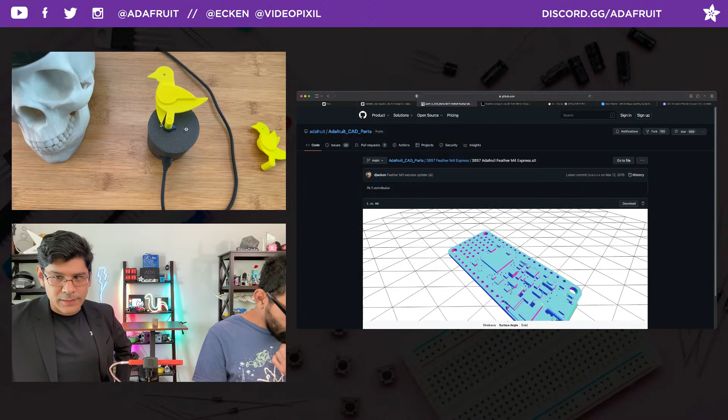They have this little viewer here. You can change up the type of rendering in the viewer, which is kind of nice—you can get a good look at it. And you can download it right here if you need to, so you can download it that way.

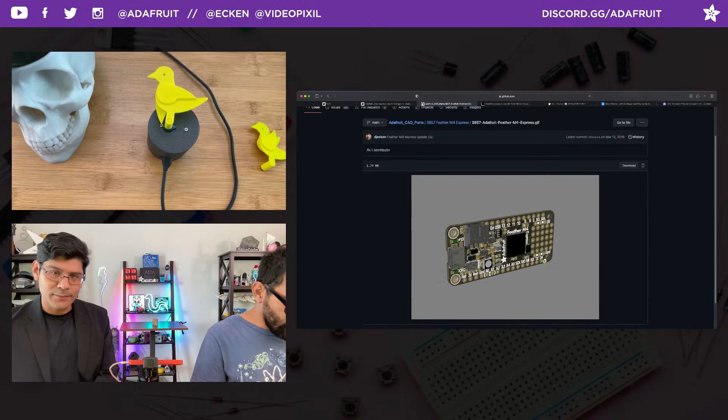We also have a GIF or a JPEG as well if folks want to just get a look at it. This kind of includes the silk screen and some of the traces and things like that, which is really over the top. But it's sort of a free thing that we get because of the way we generate these.

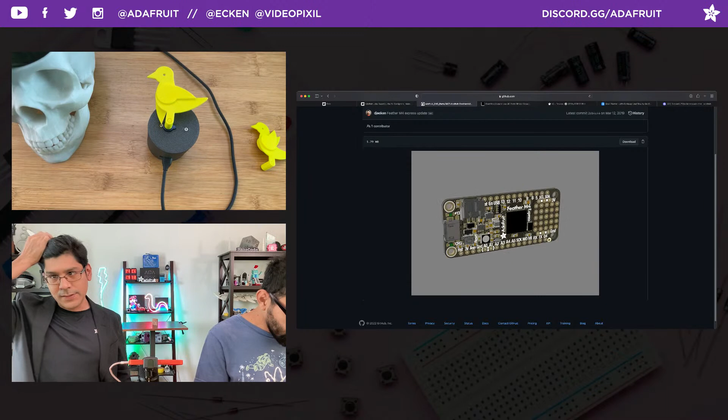Literally, we take Limor's Eagle CAD design and click a button that says convert to 3D model, and that brings it into Fusion 360. Then I manually map all of the components, such as the USB connectors, the JST connectors, resistors, and all the onboard IC chips.

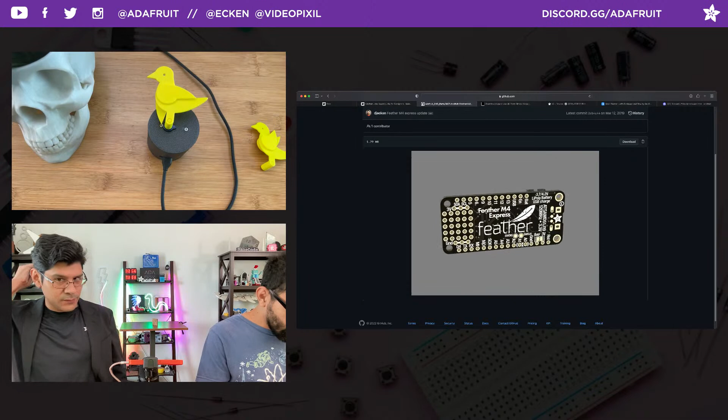Yeah, I have a layer-by-layer tutorial if folks want to learn how to do that process. Fusion 360 and Eagle are still free, so you can give that a shot if you want to try to make some parts that we haven't made yet.

If you don't find what you're looking for, you can go to the Issues tab and create a parts request. So that's totally okay to do.

And then I want to give a shout out to everybody who's been contributing, creating pull requests. And if you have not used GitHub before and you're a little wary of doing a pull request, we have it heavily documented in our Learn Guide.

So now over to the Learn Guide. You can search for it, or you can see it's part of the new Learn Guides published this week. The overview here just kind of walks you through what the CAD parts is. We also have some more deep dives into using GitHub, like an introduction to GitHub or contributing to the CircuitPython repo on GitHub—we have dedicated guides for that.

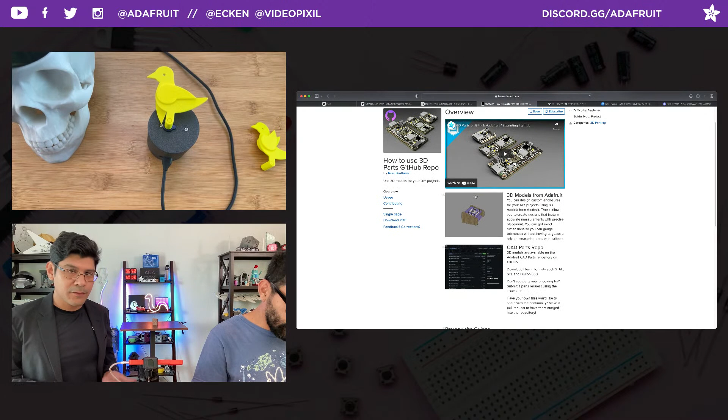But mine really is focused on how do I use the desktop app, the GUI interface, so you don't have to do any terminal stuff. It's really simplified. So the usage page just walks you through how to use it, kind of just how I showed you guys now—how to browse through it, naming convention, what type of formats you'll find, and how to do the parts request.

So all that's there, documented, and then there's a link to it. The contributing guide really sets you up from zero to finish.

So creating, first of all, download the GitHub desktop app. I cannot recommend it enough. If you're new to GitHub, consider using the desktop app and not worrying about commands, because it's really easy and user-friendly to use an actual desktop app that has buttons and things.

Yeah, I saw Brent post that the latest, I think it's the Ventura macOS update, deleted some of the Git commands, so you have to manually reinstall those. So this would probably help out with that.

Sure, yeah. So once you download the desktop app, you'll want to create your login, then clone the repo. I'll just walk you through which tabs to click on. You want to go to the URL tab to clone the repo, and what you're basically doing is downloading the entire subset of parts onto your local drive.

If you want to contribute, that's kind of how it has to be. If you're worried about file size, consider that, but I don't think it's more than 1 gigabyte or anything like that. I think it's under 1 gigabyte, but we'll see.

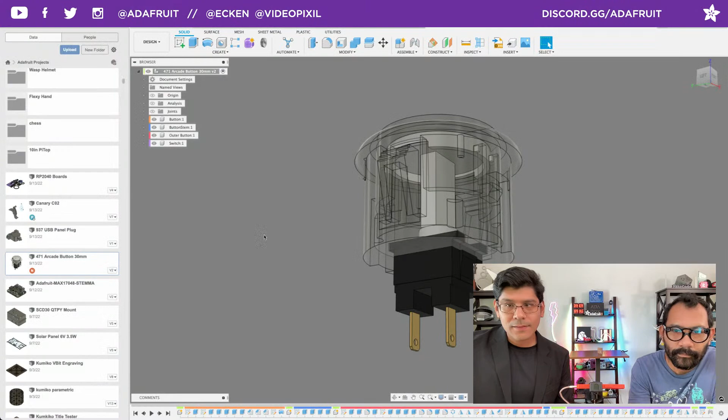But take a look at the model here in Fusion 360. This is a fantastic model by Ari, and they did an awesome job. This is the Fusion 360 file, so you can see exactly how they put this together, and it's accurate and very detailed. That's very cool, a lot of work put into this part. Looks fantastic - I like the way the timeline looks.

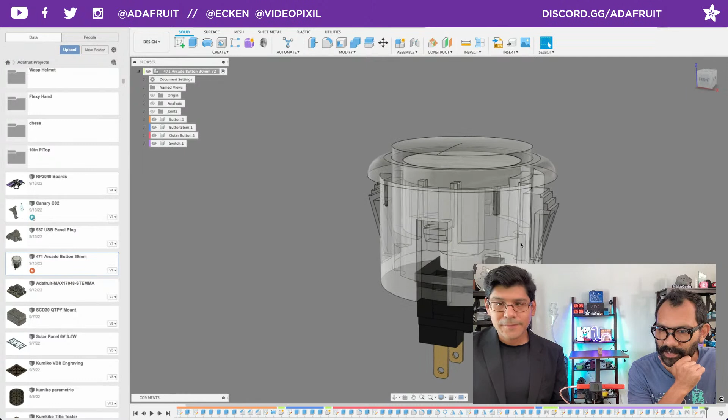Yeah, I try to keep my timeline to like one scroll or no scroll bar where it shows up, so I like combining jobs into one thing. Fantastic, which means no moves - don't move stuff. Also added was a USB panel plug.

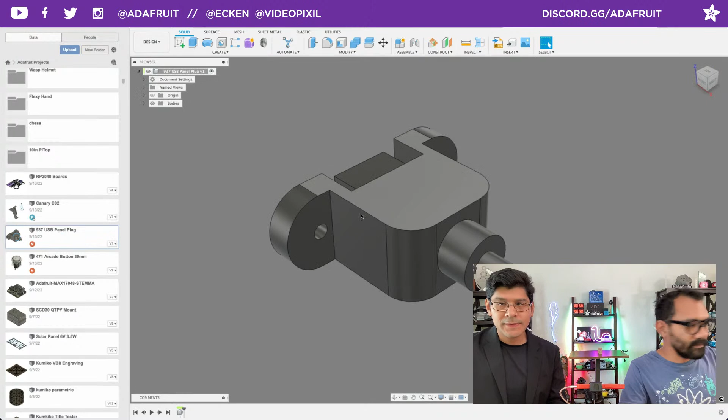It doesn't have to be super detailed. All you really need is mounting holes and some sort of shape - a lot of the times we'll do parts like this where they don't need too much detail. They're just a bit - I'll project the sketch on it and grab just the holes, copy that and paste it into what I'm working on, because I don't need all that geometry bogging down a big project. So whether you want to go that route or the simple route, we really appreciate these folks adding these parts.

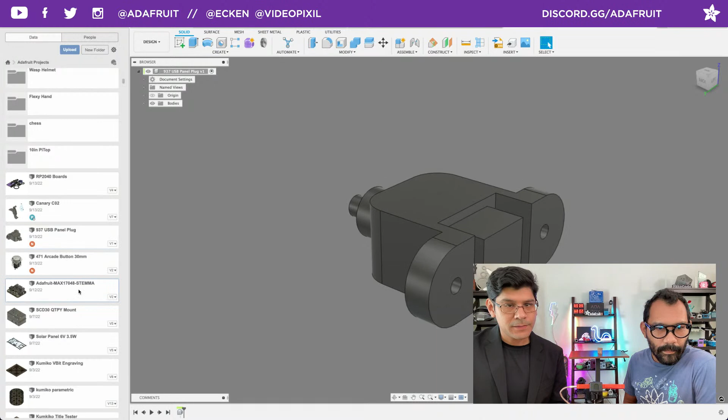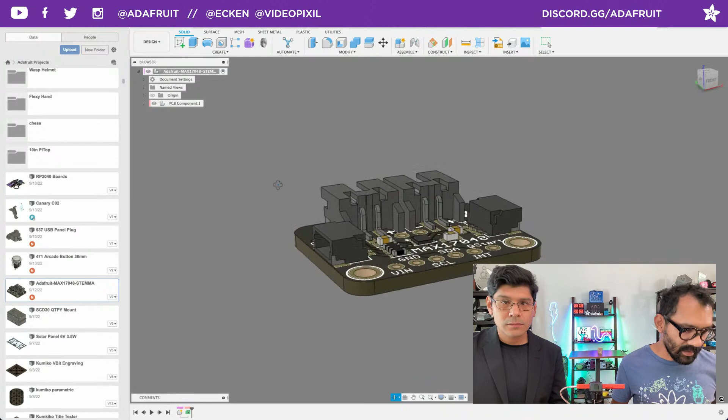And then here's the part Pedro added. This was generated with EagleCAD using the Fusion 360 converter kind of thing that's built into it now, which is great. Quick note here, DJ Devin is saying that you got to remember the free version of 360 does not support libraries, so keep that in mind. I'm not using libraries here, so that's good - this is using kind of the traditional PCB component.

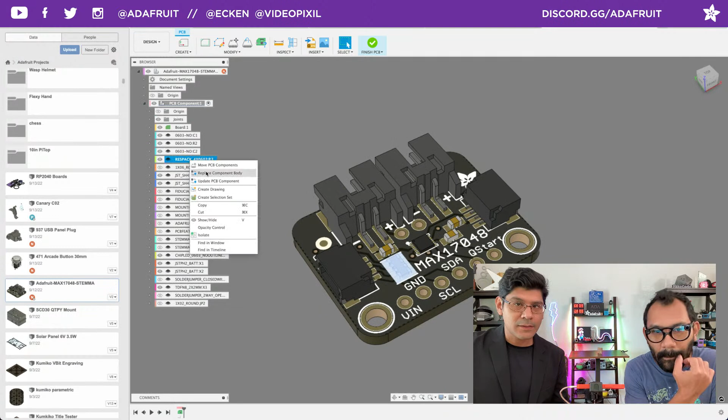Using a library doesn't allow you to manually map components. So in these versions, you can always come here, edit the PCB component, right click and replace component body, and then add any step file. A lot of the times chip manufacturers will have a step file available to download - that's how I was able to get most of the things. And then you could also generate a part. I don't know if that's free - maybe that's what you're talking about. There's a part generator in Fusion where you can generate parts.

But if you don't have that, you could go to library.io, and I believe that's free. Library.io is a separate part - it's kind of like they took the tools from Fusion 360's part generator and made it its own web thing. So you can go to library.io. Let me see if that's even still there - I'm pretty sure it is. Every now and then I'll check out library.io.

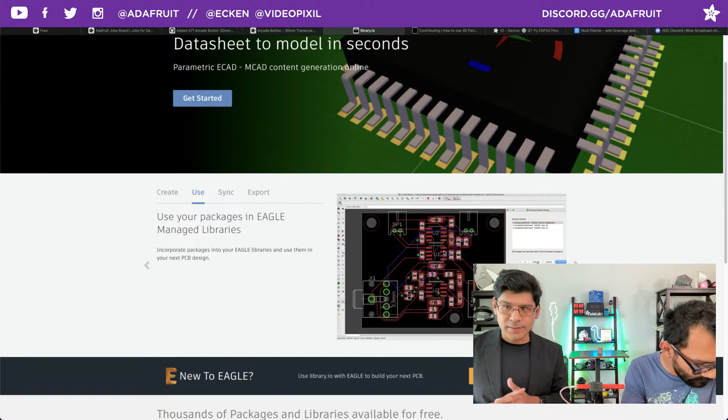It's data sheet to model in seconds, so it's literally a great tool if you want to make a generic kind of part. It has great tools for making different footprints, such as DFN, QFN, the resistor packs, and some of the other ones - what is this, SOIC and SOP.

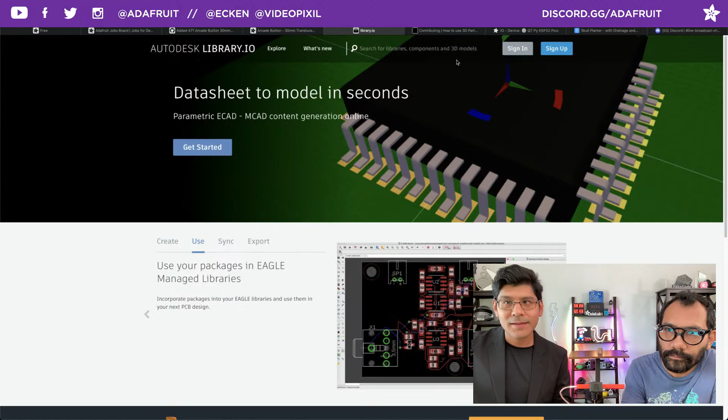Check out library.io, sign in, and see if it's something that you want to do. They also have, you can search for parts that are already kind of pre-designed - here's an example of that. And I think that was the golden nugget here for DJ Devin. Definitely check out library.io, and you can make some models.

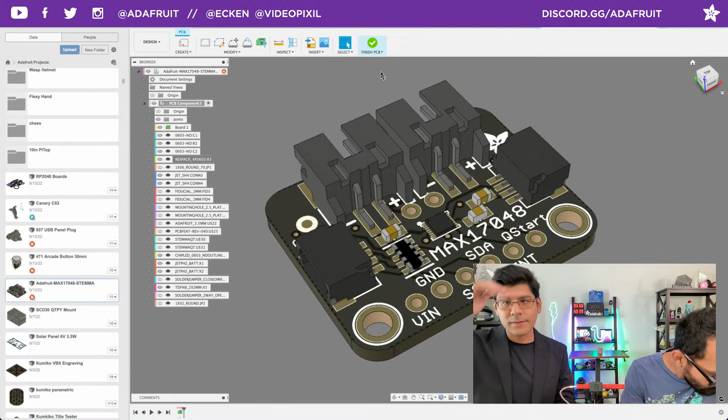It's off the model we go. DFN - do they have any DFNs? Yeah, they have some DFNs, and you can generate your own using their kind of builder. Once you sign in, you get a nice little panel where you can choose what footprint you want.

So that's kind of a breakdown of CAD parts, how we make them, how you can make them. These are available now, so if you are using this battery monitor in your designs, you can create a custom mount - it's got all the things there. And there's some other things too, like displays and things that we've recently added, so check those out.

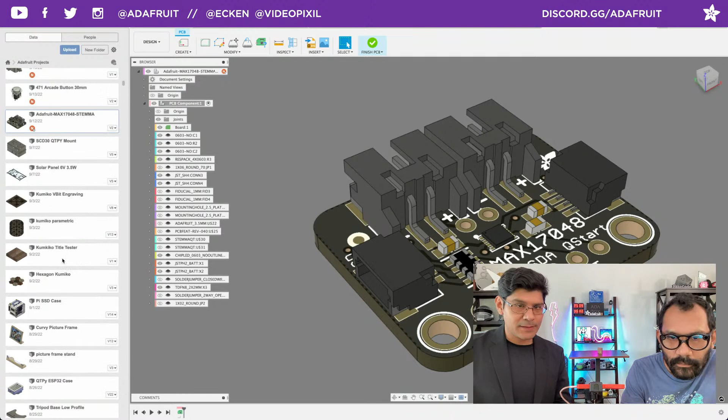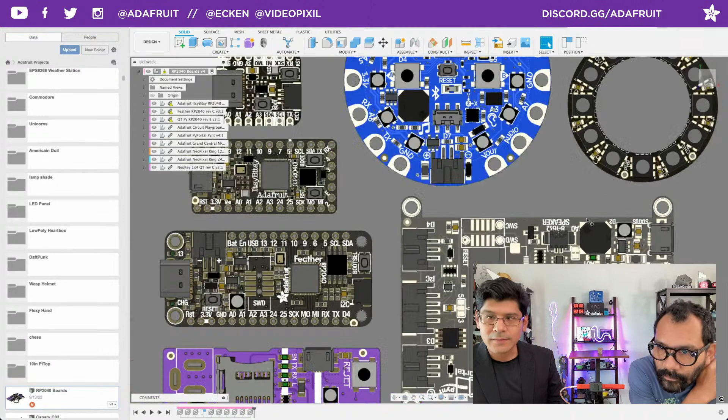We have a lot of the flagship products like PyPortal, the Grand Central, all of the feathers, lots of NeoPixel rings. They're all there in the GitHub repo. Just give you an idea of some of the main boards: Itsy Bitsies, the QT Pys, the Circuit Playgrounds, the rings, the IoT displays like the PyPortal. This is the Pynt version. You can see they have the micro SD card. All of these are like models that are available on various sites.

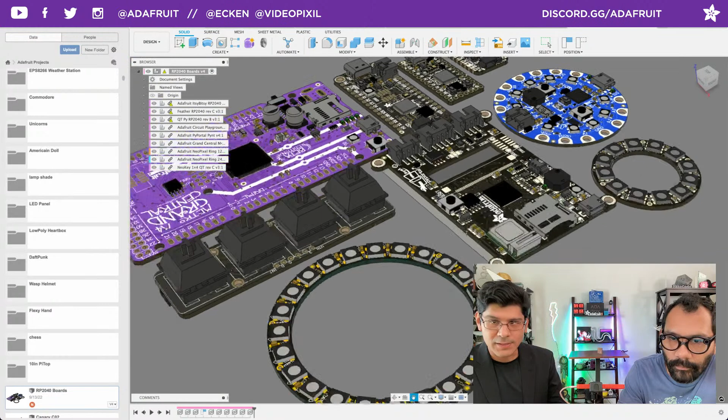Like GrabCAD, I think, has a bunch of connectors and things, but also places like DigiKey, and they'll link out to SnapEDA and some of the other places to get parts. They offer CAD models.

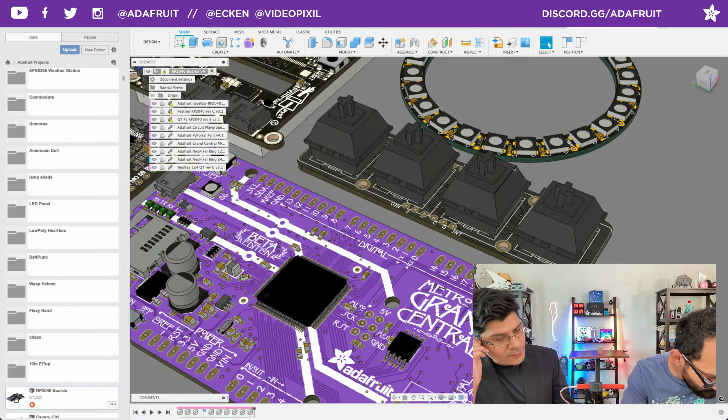NeoKey is right here. While you're on the NeoKeys, DigiDevin is requesting the step switches. Yeah, I gotta make one. I think maybe Todd Bot might have them. I thought I saw it 3D modeled. You could always check out Todd Bot's GitHub repo. Maybe pull it out. Or if Todd Bot wants to contribute to the repo, he totally can.

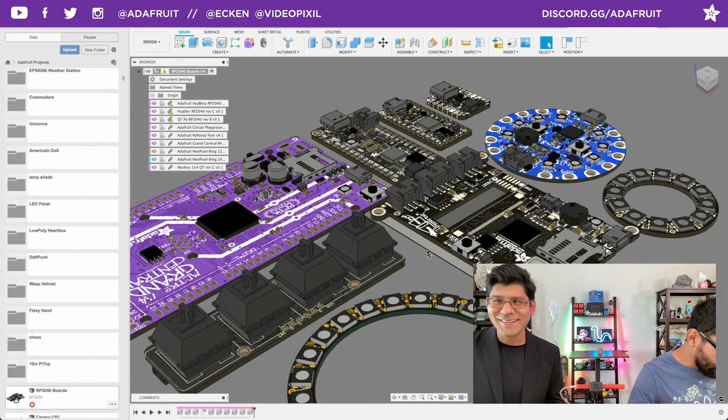But if nobody's added it to the repo yet when I get to the project, I'll add it myself. That's normally what I do. I kind of do it on a need to use basis - that's when I actually start making parts. But a lot of times, when I have some free time, I'll generate some parts that are under the parts request in the issues tab. So a lot of CAD parts.

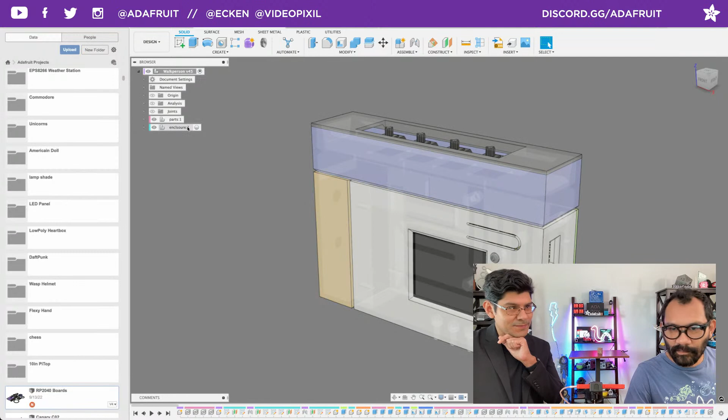I mean, 9 years, so. We started out just kind of manually designing, making them from scratch. Measure. Oh. Yeah. My bird has died. That'll make sense in a little bit.

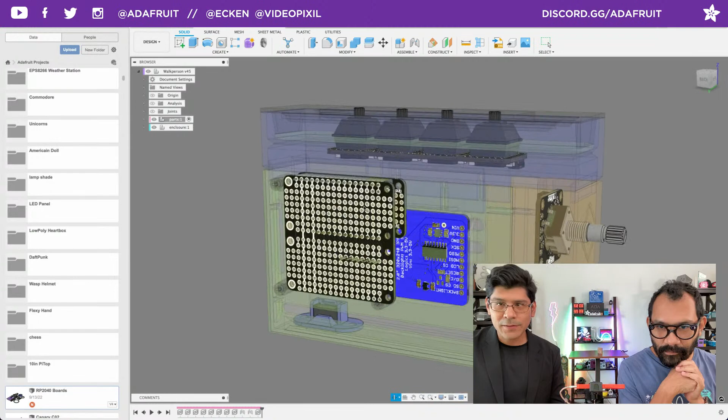Here's an example of our recent project collab with John Park. It's an Mp3 Player. We have quite a bit of models here. We have the Rotary Encoder, the 1x4 STEMMA QT NeoKey, the Featherwing Doubler, the Feather M4 Express, and this lovely SPI TFT display. It's a 2.0 inch. We even have a little SD card here just to give us an idea of where that's going to be.

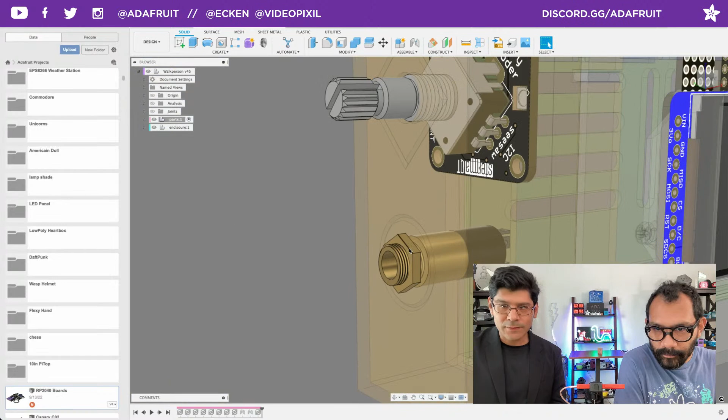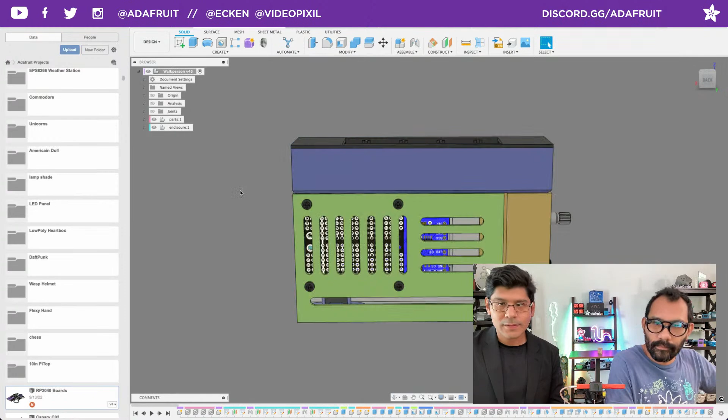We also have these jacks that we stock in the store - these audio jacks are really nice. And then a little slide switch holder here. So this is a good example of using the parts from the repo to design a case. And here's what it looks like with the whole thing put together. I didn't quite model the keycaps, but you could do that if you'd like. That's just a little taste of that.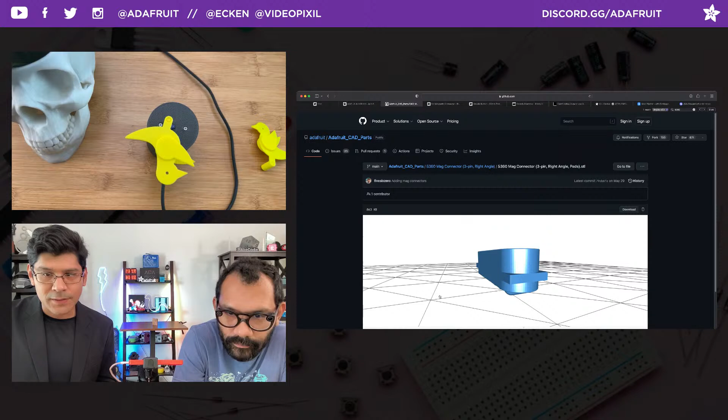So it's 5360. Let's go to the list. 5360, and there are the mag connectors. And here are all the possible things you'd want. Let's do an STL because it has a built-in viewer, so I can just see it here. But I remember opening it in Fusion and thinking wow, this is super detailed, and all of the materials were colored and everything - all the solid bodies were colored, which is cool.

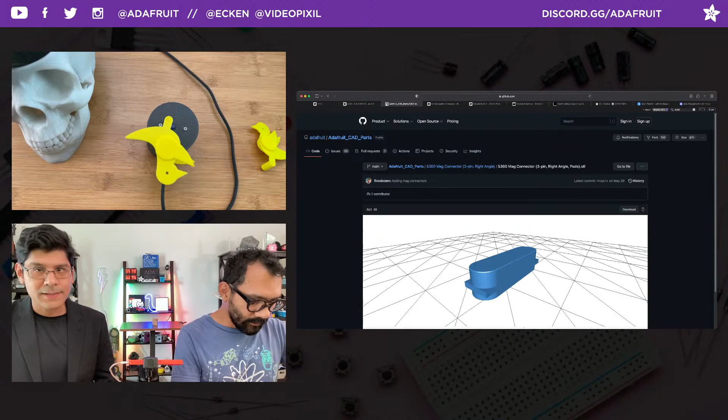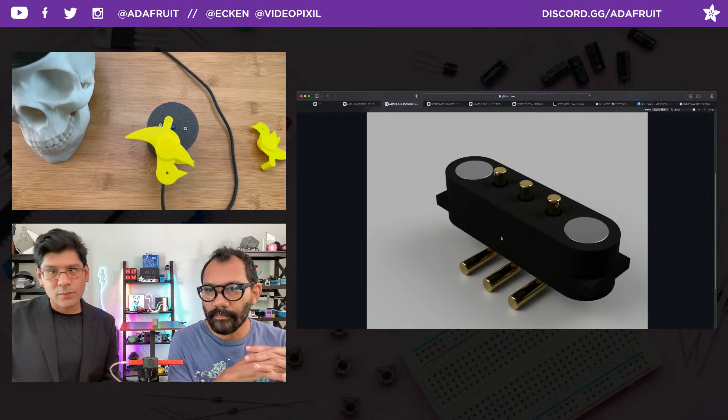So check these out for your embedded projects. I think these would be great for folks that do wearables, like Deborah or Charlene - I can imagine them using these magnetic connectors. This is really cool art, so a PNG, what it looks like - look at that fantastic render. It's all rendered out of Fusion. Looks great. Yeah, so check them out. Super cool.

Macintosh Librarian says it's perfect for mounting brackets and such. Liz says projecting mounting hole dimensions for days. Yeah, that's what's up.

I'm glad this finally happened. We've gotten enough emails from Limor and PT, with users asking about CAD parts or asking to contribute CAD parts, so it's time to make a guide and do a video. We talk about it every week, but not everybody has a chance to check it out, so this is a nice way to alert people it's been up there for weeks, and show how to contribute to them and how to use it.

It's kind of like a weekly segment. Here's the new parts on GitHub - what do we have this week? We got some STEMMA sensors and some displays. Each week we'll come on and update folks on what new parts have been added or what things are out there. Let's check out the comments.

DJ Devin is saying they were talking about the USB C and B tips that were added this morning. The magnetic ones? Yeah, those could be nice. All right, cool, and that's this week's project highlight on how-to.

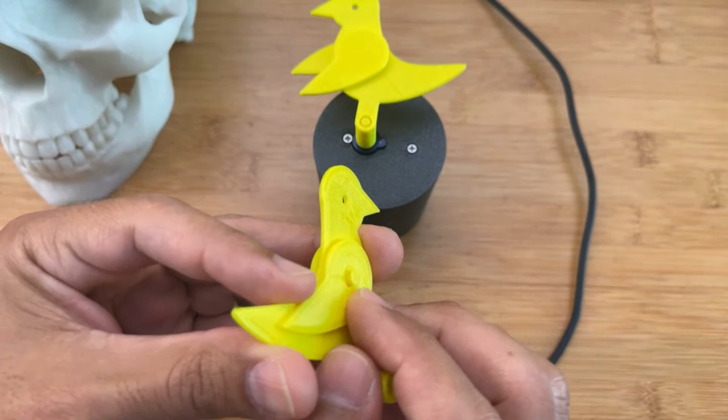Yay. And what we're using here are some nice little hinges - let me grab this one. Using that technique where you burn to create a little rivet on the other side to make a nice joint, there's little feathers on there that rotate. So it's a whole servo horn, three different parts, we're just printing this out for the bird here.

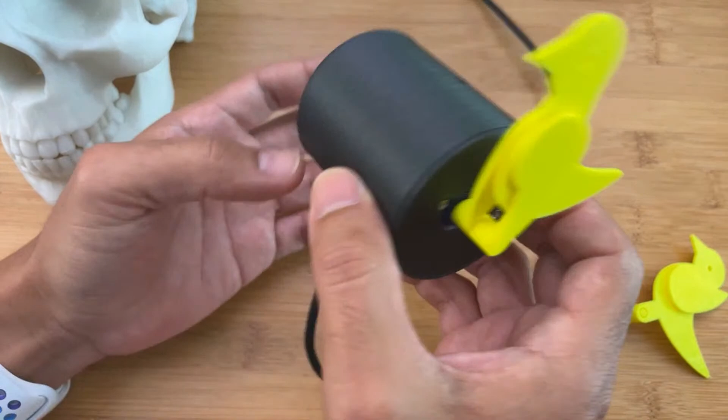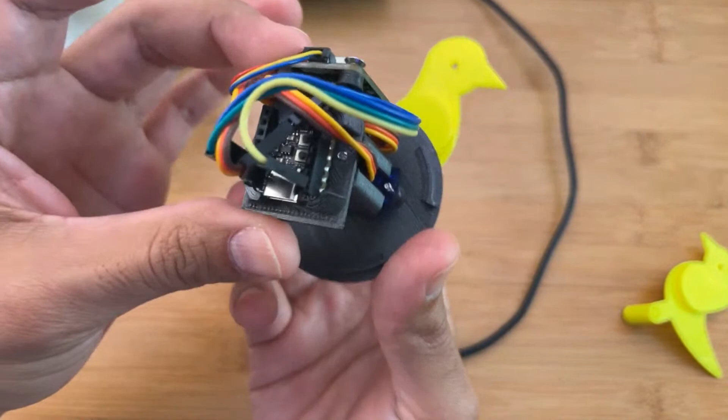On the inside, let me unplug this guy. So on the inside, it's a snap fit case, and of course it's mounted to a little QT Py Pico.

It's on the back here with a little micro servo, and everything is just screwed together. It took a little bit of time figuring out how to combine all these different pieces, but everything connects like that. We have a nice little editable circuit that you can use for prototyping purposes.

Oh, that's nice, the headers. You can use the headers. A little chunky, but it can be in this instance. Usually I don't like doing this because I want it to be as small as possible, but for something that's going to hang on the wall, you kind of want it to have the size you want, so it's a little bit bigger.

You have some openings for a USB cable and the actual sensor part on the SCD41. And on the back here, you just have a, what's it called, a wall hanger. So nice, simple little circuit.

What I find funny is that using all the WipperSnapper smarts and the components that we all have, Stemma as well, so you don't have to solder every single thing, you're able to recreate Kickstarters in a week, which I'm pretty sure it's going to last longer. I don't know if they're going to have a service or tie this all with a subscription or whatnot. So it's super cool that you're able to use IO.

You have the privacy thing on there, we're not going to use your data for any of that. So we set it up in WipperSnapper.

This is again a very new addition to WipperSnapper, the ability to connect servos to your IoT projects. It came out last week. So go ahead and plug it in. You'll know right away that your device is online because it says it is.

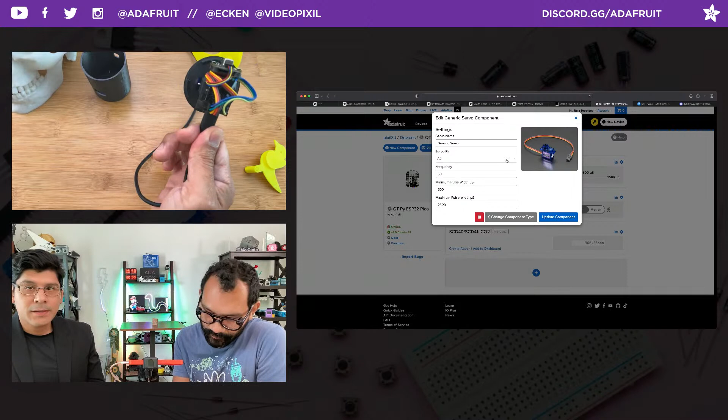You have the options to change the servo pin connected to your QT Py. In this case, it's A0. Frequency, you want to leave that by default, but you could always change that. You can change it around.

I remember overhearing Limor saying that some servos might need different frequencies, so just check your data sheet if you have something from someone else. And you have minimum and maximum pulse widths, so you can change those if you'd like. We probably need a converter for that.

The pulse width is the angle of the servo. Like how much it's rotating. Yeah, I was a little confused — like, what is this? It needs microseconds or something?

Go back to the components, just want to highlight one new addition. In the add components, now that it's online, you can see... if you scroll down, you can see the I2C components, the rest of them, and then, oh no, what happened to the one I wanted to talk about? There it is, yeah, it's the one I'm so happy about.

It's still beta, so it depends if it's the Stemma soil sensor. Yeah, of course it's making me so happy because I'm able to see exactly, instead of sticking my finger inside the freaking soil, I don't get a dirty finger anymore. I can see what the capacitive reading is — great for all sorts of planter projects.

One of the things I want to do with this is use the Stemma hub to connect multiple of these up, so I'm just using one of the QT Pys instead of having each individual soil sensor be its own microcontroller. I've got a lot of GIFs to make.

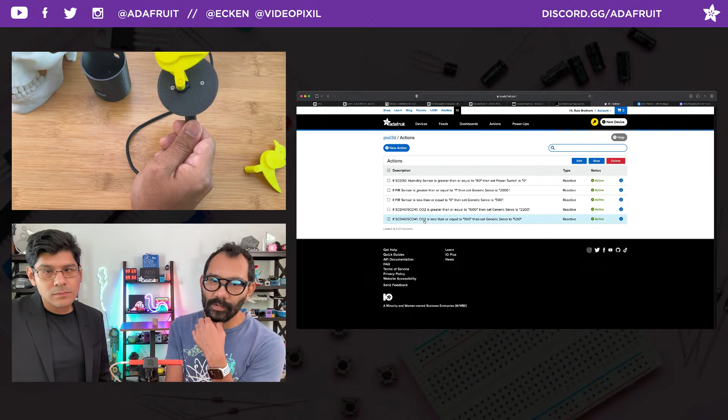If the CO2 sensor is reading greater than or equal to 1,000 parts per million, it's going to push a message to the generic servo with your pulse width there, so that's your angle in a sense. And then you can limit how many seconds it's checking for that. If it's greater than, it'll straight up just die. And then, going back to the actions, the last one: if it's reading anything below 900 parts per million, it will come back to life, and that sets it back to the Servo angle 500.

This is a cool way to... oh man, I wish there was some way to export this as code, so you wouldn't need to be connected for these actions to happen. But for now, this is so cool. You always have manual control too inside the device page.

You can always manually flip on switches, or in this case, scrub, to change the Servo angle. I might have to update the component, so let me hit update component and then see if I can get it going. There it goes. Am I in frame? I had to update the component because I guess there's a little bug where it disconnects real quick. We can go all the way down, all the way up.

It's super cute with the action of these little feathers that are going on. You can add more values and more triggers, like maybe somewhere in the middle, as he's starting to go down. That's a good point, I should probably add that, because right now it's either dead or alive, there's no in between.

And then the PIR sensor here, it's connected... or no, that's for something else, I was testing all of them, I just left that in there. Wave your hand to let the bird go up or down.

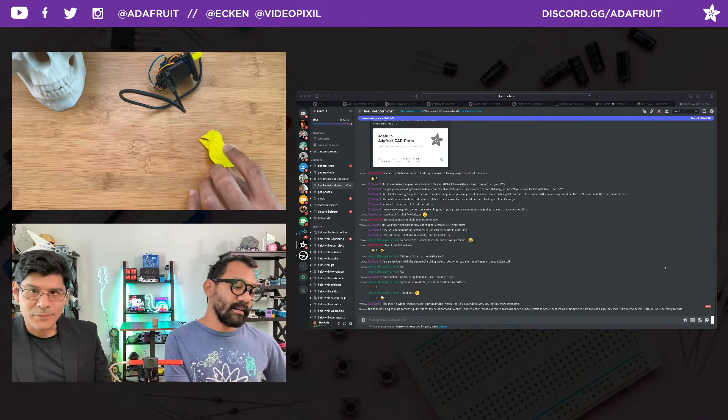Yeah, for sure, so that's what we're prototyping. We'll be having a video project on this next week. That is a good one there. It's more fun too.

Someone on the Discord is saying they're going to build something like this for the neighborhood. Their freezer is holding a bunch of beers, and from time to time there's a CO2 leak that's difficult to detect. This will work perfect for that.

Yeah, really practical on that one. For us, it's basically a CO2 monitor, just to give you an idea of dangerous levels of CO2. It's simple. We have another project that's CircuitPython, using the matrix portal, that shows a happy face or a sad face. It's pretty much that project, but this one's more physical, and less expensive because it's just a QT sensor and a servo.

Well, what I like about having that WipperSnapper layer on top of it is that you have logging. You can see at what time CO2 levels rise up, and you can share that stuff. You get line charts as well, so you can visually see patterns if you need to see any patterns of CO2.

And the SCD41 has not just CO2, you can do the temperature and humidity too. So you have all that other additional info that we don't have on the matrix portal. But it's a great project for all sorts of people to do.

Cool, all right, and that's what we're prototyping. We will launch this next week. So happy, just with the little wings.

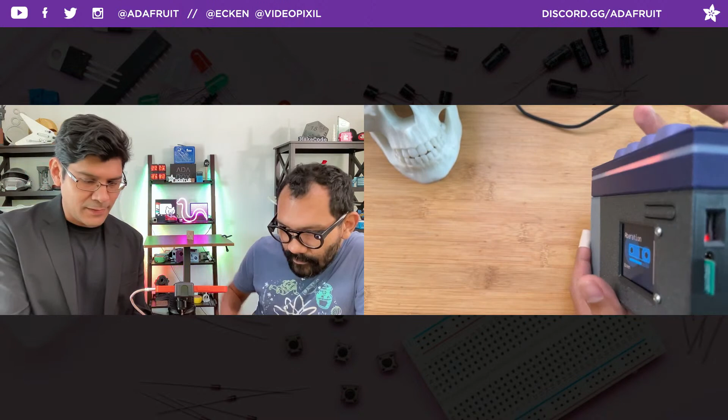So a little bit beyond prototyping, the guide just went up live. You can build your own DIY MP3 player with CircuitPython. This allows you to use the micro SD card slot that's a part of the display, and it lets you play MP3 files. So here I have some MP3s.

It uses the Rotary Encoder as the volume, using some libraries like the progress bar to do a volume here, so I can change the volume. And then you have a progress bar for the track itself. So I have a track ID of the title, that's my pseudonym for my artist name, and then that's the name of the song.

You can use these buttons as controls. So this is play, and then you can skip, replay, play the next song.

In the guide, it's using the audio jack, so you can do headphones because it's more like a Walkman. But in mine, I just threw on one of our mini oval speakers and put it right here inside the case. It's a snap fit case, so you can take it apart easily. It's got some nice features like the reset button here, which is always nice to have access to.

The NeoPixels here light up, so if I press pause, you can see it turns purple. If I press it again, it plays it. And then I think this is green. Oh, I think I crashed it. Got some memory allocation stuff going on, but thankfully I can just hit the reset button. It's a good way to test the demo.

You can also see the NeoPixel for status indicator shine through here, which is really nice. So here it is, just starting up again. That's what it starts with.

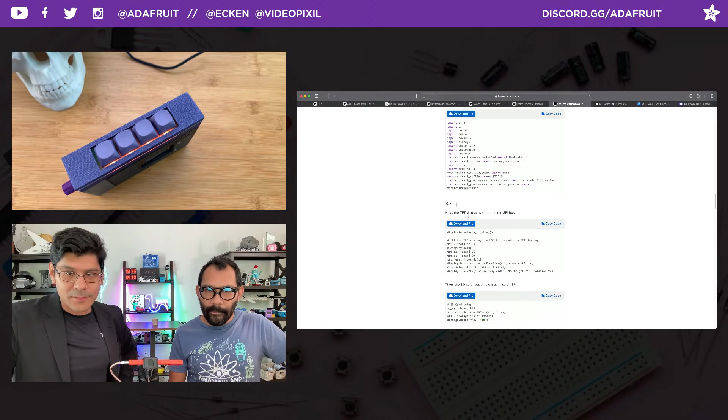Super cool, very cool. Yeah, I think for the shoot we're gonna do it over by...

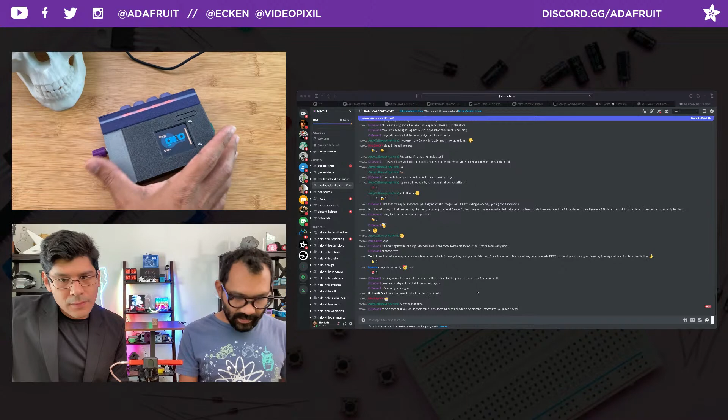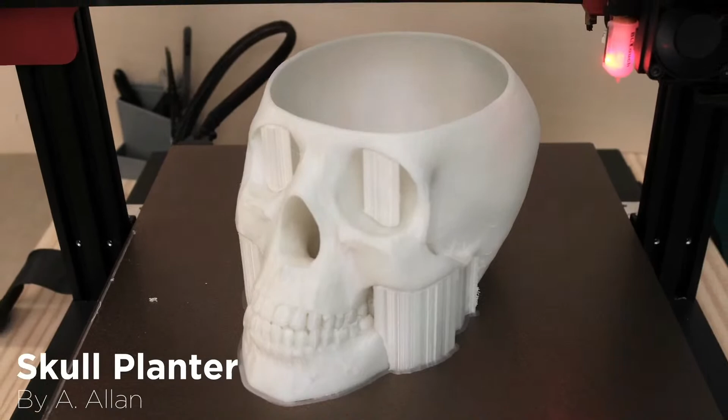All right, this week continues with more skull-based time lapses for the upcoming holiday. It's about 2-3 months long - that's how long we celebrate it. This is a planter that's kind of a remix - Allan posted this up on Thingiverse. The original post is just the skull, but Allan thought it'd be nice to make this into a planter and added some holes for drainage.

I took this opportunity to test out some other glow-in-the-dark filament, and this stuff - look at this atomic looking blue, aqua, blue-green. It's not going to show up on camera obviously, but I'm quite happy. It's probably super abrasive because of the amount of glow-in-the-dark powder they add - quite a bit. If it was super dark in here it would light up so much. It stays lit really well, and it's one of those glow-in-the-darks that gives off a nice hue. So super happy with this.

You can use it as a planter or probably a candy dish. They did add drainage holes, and there's a separate part with a tray, so if you want to bottom-water your plant this is a really good way to do it. It does require quite a bit of supports underneath - would have been cool if it was simplified on the bottom. There's a bunch of detail that's super cool if your printer can resolve it. Look at that - all these tiny little crevices that came out, I'm surprised.

Let's take a look inside it. It's a free download on Thingiverse - again, it's a remix by Allan of Snit Designs who posted it up. Here's their posting of it, there it is, glow in the dark. Thanks to Moti Zuma for the original tray design, and the original skull planter is here - here's the original one by Martin Hinner who posted this one up.

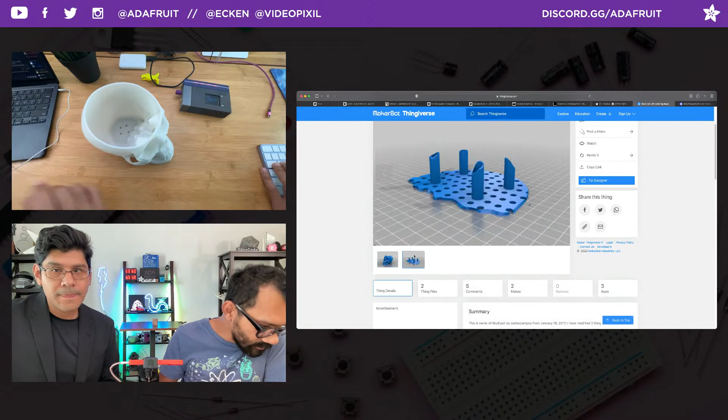Brent likes the skull planter, so I guess I'll have to use it with the Stemma Soil Sensor. I think this is a remix project of a remix of a remix of a remix - I love those, this is deep, I keep going back to different remixes. This one I'm guessing by Carlos Campos - what's it posted called? I printed this remix of one from 2013. I just went like 4 remixes deep, that's wild. Hey, if it works, why not add onto it? And this is a remix too - does it end?

This is why despite all the hate towards it, Thingiverse is still going. I love the way that all the attributions are linked this way.

I found the original, and it says, 'I couldn't find a printable skull on Thingiverse that had a removable mandible with the teeth included, so I created one. Originally this was a SketchUp model that I imported, sliced, diced, and printed on my Thing-O-Matic.' Again, this is the other reason why I like it.

I guess they just forgot to upload the bottom part, so we don't even know where the original is. It's like crime scene investigating CADs. Like, what's the origin of this?

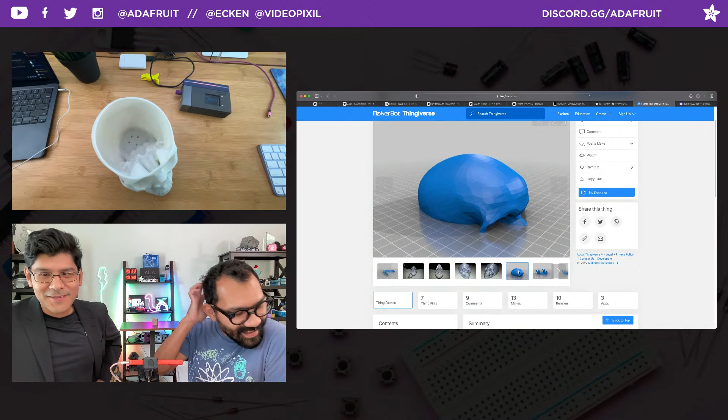Paul says it's 3D printer inception. Yeah, boy, golly, we literally went five deep. Wow, that's wild.

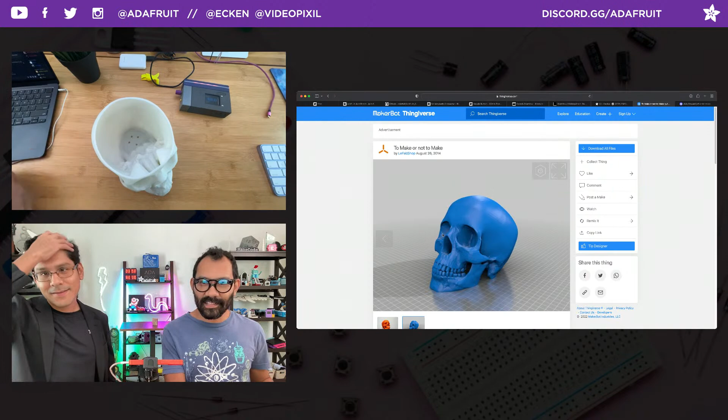To make or not to make, that is the question. To remix or not to remix? The simplified human skull, yeah, despite all the hate, I think it might be gone now that they merged with Ultimaker. But yeah, this is one of the things - they're the oldest, so you can go far back in history on what was going on, whenever we first started, like 2012 or so. Yeah, it's nuts and it's gnarly.

All right, so there's your deep dive into skull remixes. Still get shoutout tips to the whole community - I don't know who to credit, it's hard to pick exactly who. I still get tips from, what was the first thing, the coral cuff that we made so long ago. Oh god, in 2012, it's like, what?

Yeah, okay, thanks. So that's this week's community makes - skulls, they go deep. We have some more community makes that were sent to us, so let's take a look at those, if I can sort it out here in the notes.

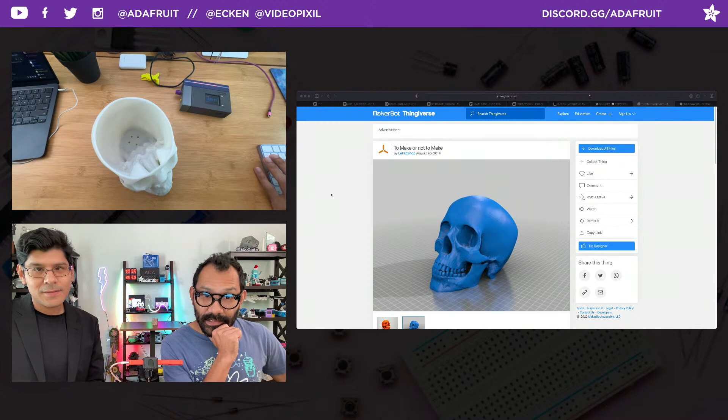Scroll down, let's start off with this first one. This one is so cool - prop maker Keyblade. This was posted on Twitter by Danielle Dinokla.

Danielle - they are a cosplayer, and I believe they do stuff on Twitch. But look at this fantastic build. How freaking cool is that? It's completely different in terms of the embellishments and the theming of it. Yeah, this completely custom in that whole thing.

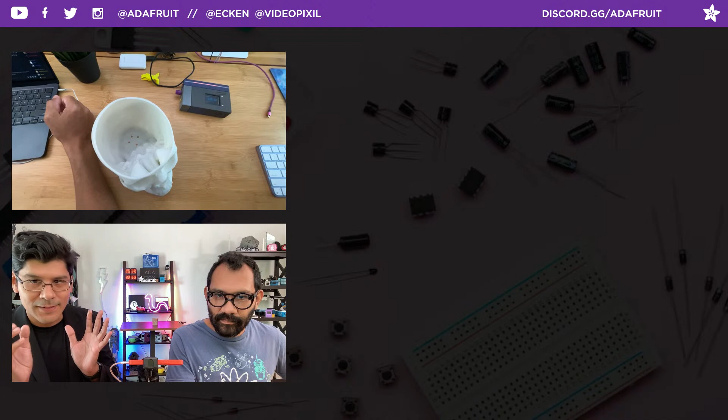Yeah, so the thing in her hand, it's hard to tell, but that's the Keyblade that we did a few years ago. It uses the prop maker Featherwing, a Feather M4, and a ton of NeoPixels. It has sound effects and all that stuff, and it looks really fantastic in this rebuild - it's fantastic cosplay. The tail and everything, it's crazy.

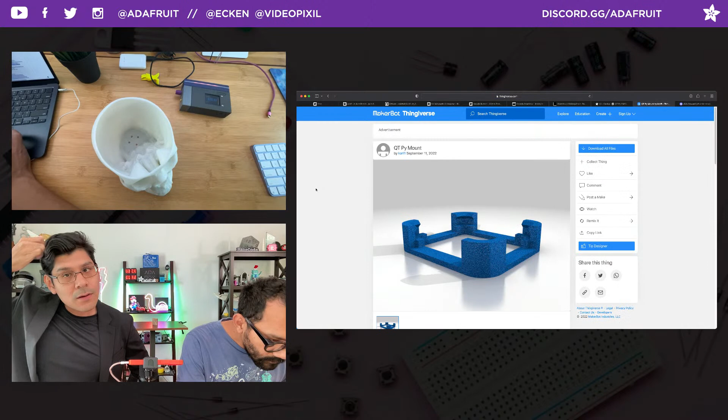Thingiverse user karlfl posted up the QT Py mount. They say they extracted just the QT Py mount from the NeoKey keyboard, the NeoKey emoji keyboard. This will allow you to easily add this mount to other projects without having to recreate it. That's nice, I like that. Shout out to Carl for posting that up on Thingiverse.

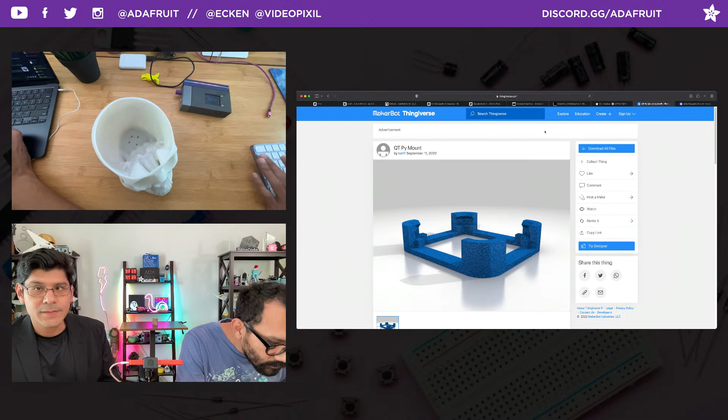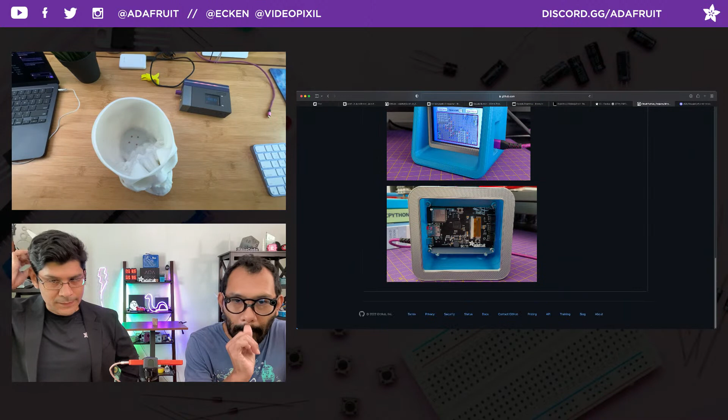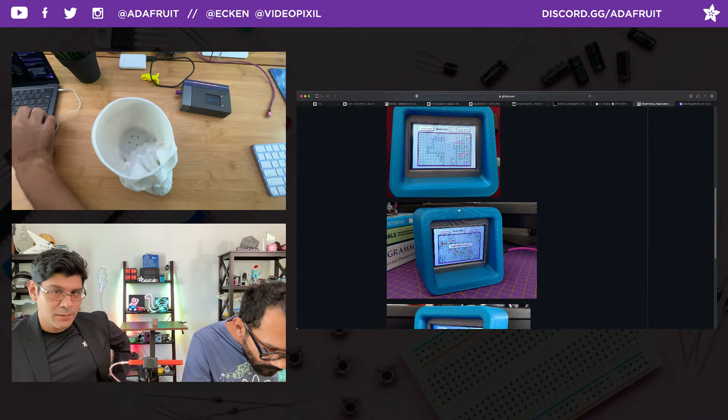And now we are going over to GitHub. This was actually posted and featured in the Python on Microcontrollers newsletter, by GitHub user SMKYMKCT, who created a Minesweeper game on Adafruit's PyPortal, using our 3D printed retro case that snap fits together and houses the Titano. We have 3 different sizes, so if you have a PyPortal and you want this kind of enclosure look, we have them in 3 sizes: the Titano, the regular, and the Pynt, which is the smaller version.

But yeah, all this I believe is in CircuitPython. Yes, it is, and it has all the fonts, and all the STLs as well are there too if you want to print them out. But yeah, Minesweeper, I want to play Minesweeper now. It's a fun game.

Cool, all right, moving along. Next project is on Twitter, we're getting makes from all places. This was posted up by Peter. Peter posted up their make of this flaming torch. It uses a Gemma and a NeoPixel ring or NeoPixel jewel and a 5-volt DC fan. So this creates this kind of flame effect with some silk fabric mesh, and the fan and the Gemma and the jewel all sandwiched together that fits inside of the base area of the torch, and it makes this cool fire effect.

We got inspired by the Pirates of the Caribbean ride because they have a similar kind of light and a fan and this fabric that makes it look like it's a fire. It all snap fits together and screws together, so it's really fun to see other people make it for their props. So shout out to Peter.